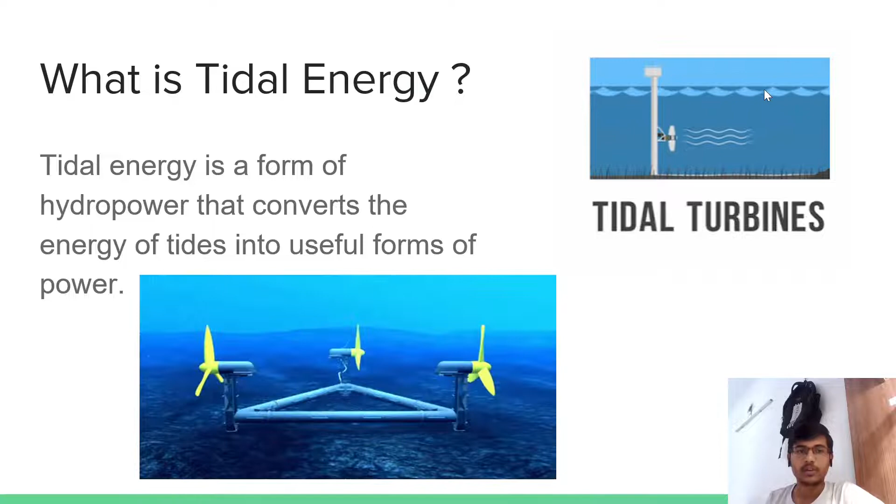So the first question in your mind is, what is tidal energy? Tidal energy is a form of hydropower that converts the energy of tides into useful forms of power. As we all know, demand of electricity is increasing and global warming also threatens human life. It's time to move away from fossil fuel and other sources. So we choose tidal energy.

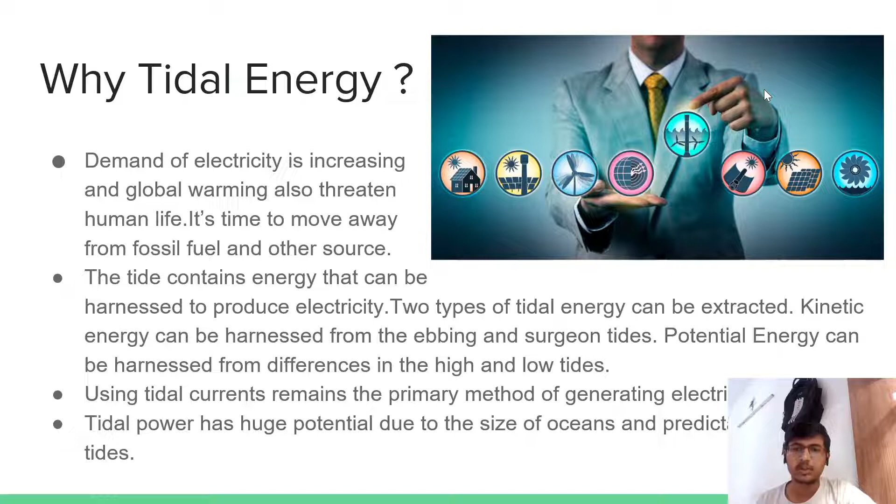But why tidal energy? There are various other sources like solar and hydro, etc. The answer is that tidal power has huge potential due to the size of the ocean and the predictability of tides, which makes it a great option against other ones.

The first tidal power station in the world was built in 1966, located on the Rance River in Brittany. The plant was for 45 years. Its 24 turbines reach peak output at 240 megawatts and average 57 megawatts.

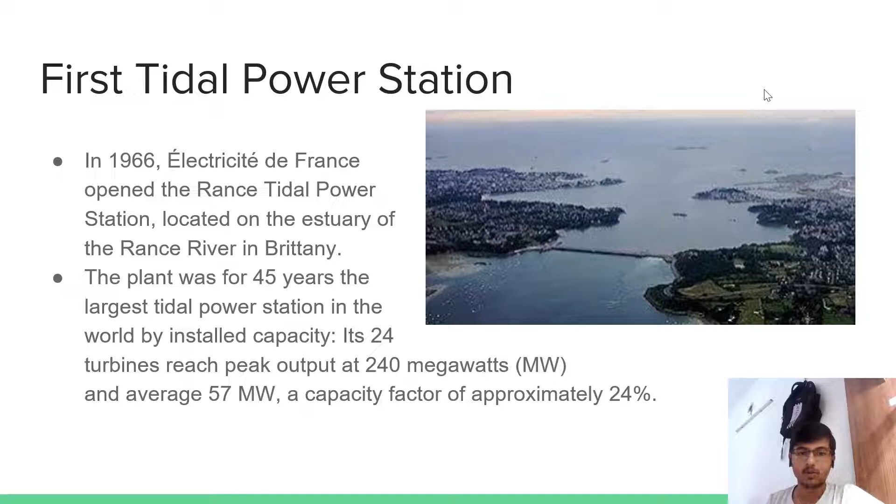Some other important key terms you may need to understand: first one, tide. The alternate rising and falling of the sea, usually twice in each lunar day at a particular place due to the attraction of celestial bodies, is known as tide. The second one is tidal force. The tidal force is the vectorial difference between the gravitational force of the earth and that of the moon.

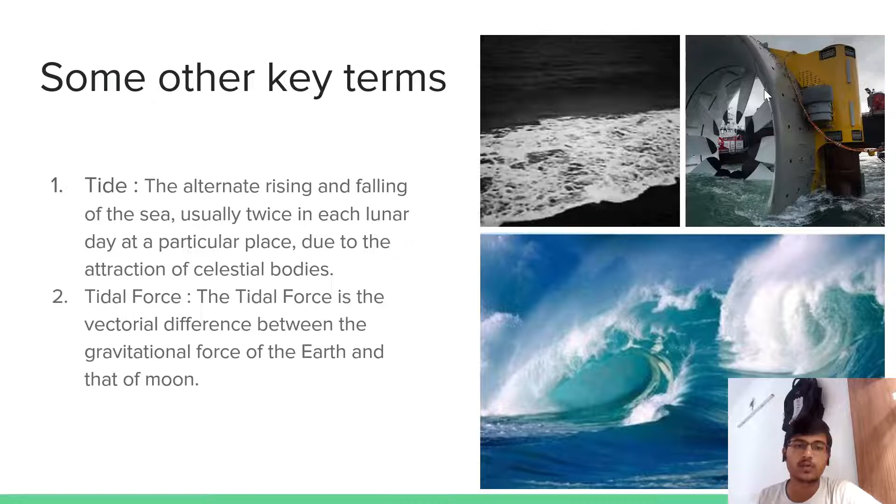But do you know what causes the tides to be generated? Let's understand the basic physics behind the tide. The gravitational pull of the sun and moon is the cause why tides are generated. There are two types of tides, high and low, during each period of rotation of the earth. As the moon and earth swing round each other, ocean water is thrown to the side of the earth away from the moon. At the same time, the moon's gravity attracts water to the side facing the moon, resulting in two periods of high tide every 24 hours.

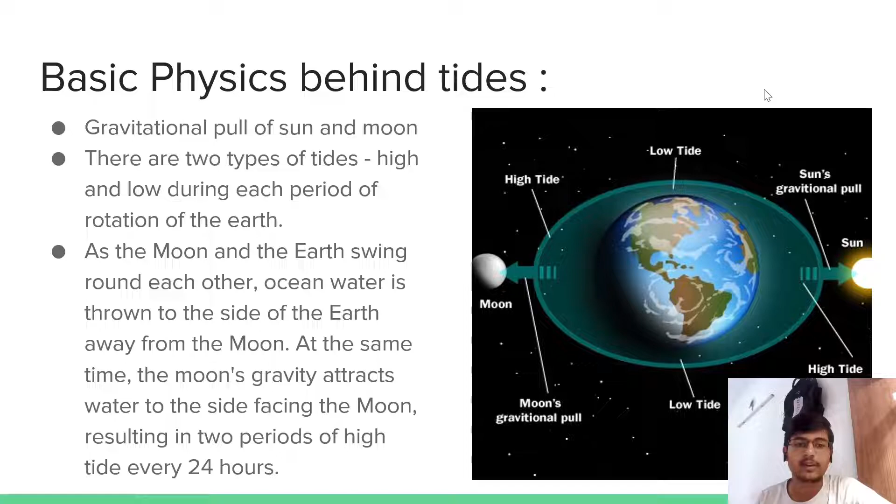Now, after understanding all the theoretical things, let's understand how to generate energy from tides and its various methods. There are mainly two ways of generating power through tides. First one, tidal stream generator. Second one is tidal barrage. The tidal barrage has the following three types of generation: ebb generation, flood generation, and dual flow.

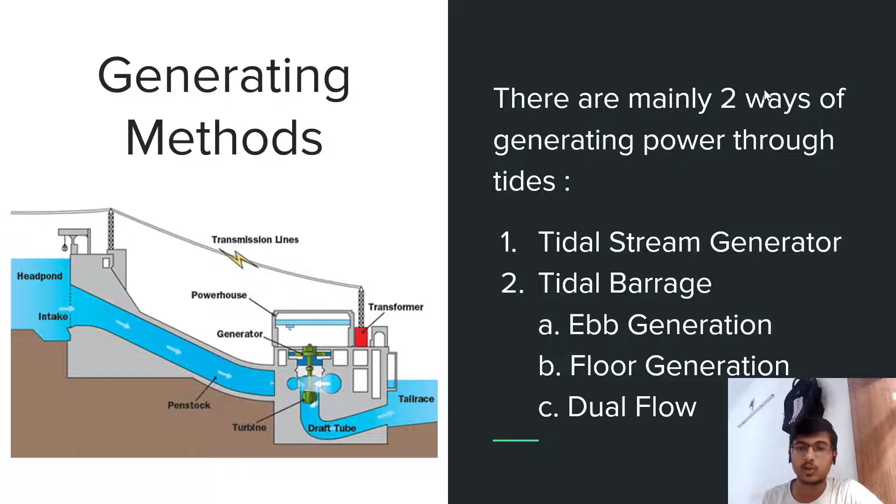Now let's understand the tidal stream generator, which uses the kinetic energy of flowing water. It can also be installed in the river, straits, conceived in the 1970s. It is the cheapest and less damaging method. Compared to wind turbines, it has similar power at a water speed of 2 knots, and 4x power at 4 to 6 knots.

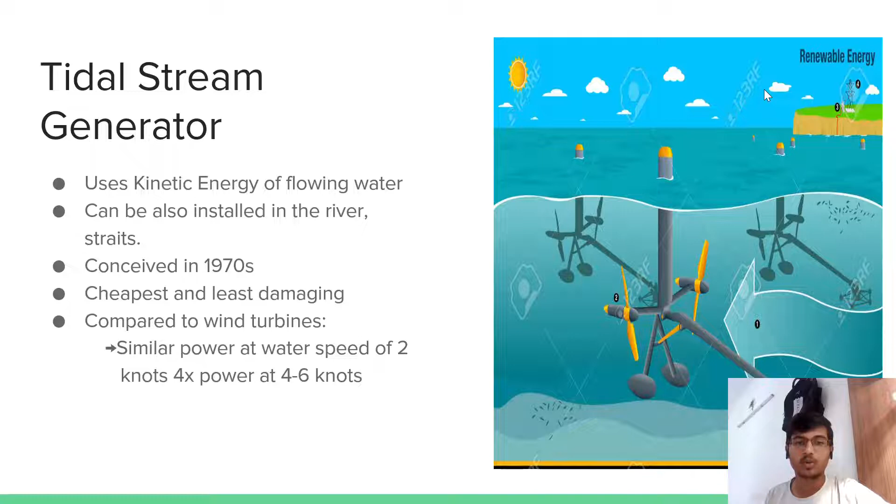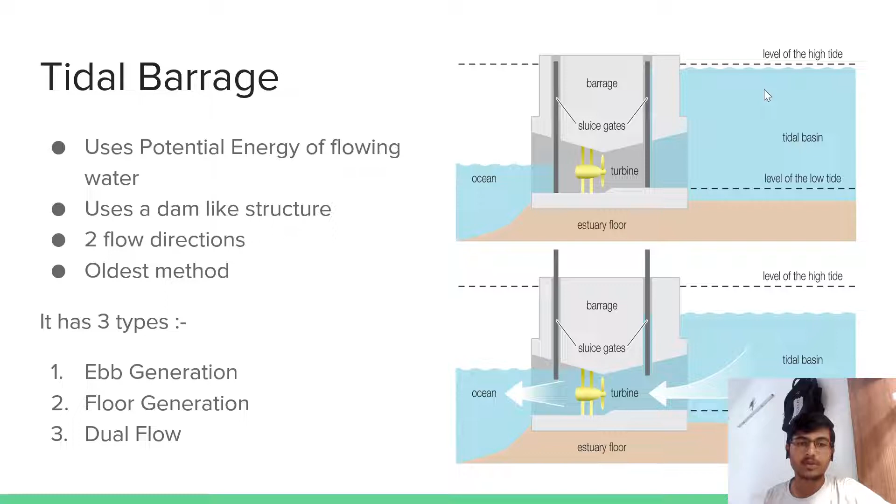Now, the second one is tidal barrage, which uses the potential energy of flowing water. It has a dam-like structure, two flow directions, and it is one of the oldest methods. It has three types. First one is ebb generation, second one is flood generation, third one is dual flow.

Now let's understand the ebb generation working. The basin is filled with the incoming high tide current. Sluice gates are closed. When the outside water level is low enough, gates are opened. Now the water going out starts running the turbine, which generates the energy, as you can see in the picture below.

Now let's understand the flood generation working. Now the basin is empty with low tide. Sluice gates are closed. When the water level outside is high enough, gates are opened. Now the water flowing will rotate the turbine, causing the generation of energy. So it's like the opposite working of ebb and flow.

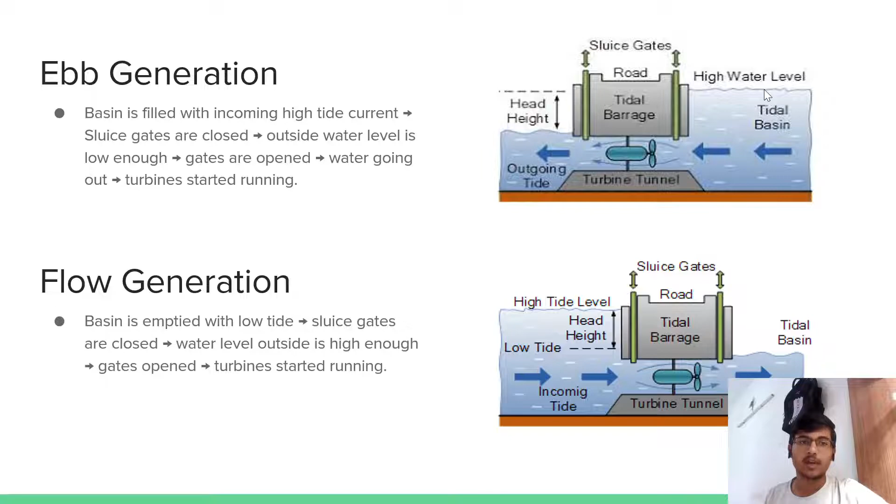So till now we have discussed all traditional methods which are currently in use. But what are the latest upgrades in the technology? Let's check it. First one is Tidal Lagoon. It is a new design made from a combination of flood and ebb. Tidal Lagoon Swansea Bay in Wales, United Kingdom would be the first tidal power station of this kind built.

Second one is dynamic tidal power. An untried but promising technology, it proposes that very long dams, for example 30 to 50 kilometers in length, be built from the coast straight out into the sea without enclosing an area. It consists of parallel barriers to cause a water level difference, causing the generation of electricity. Currently China, Korea and the UK are working on it.

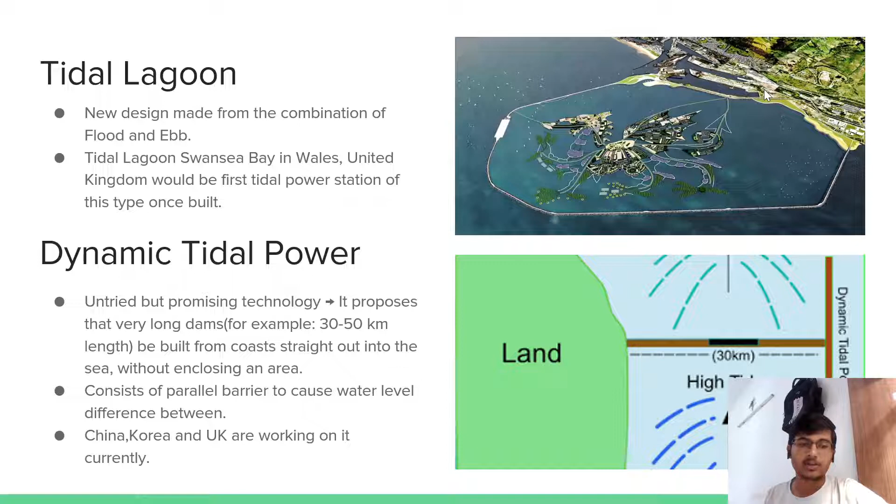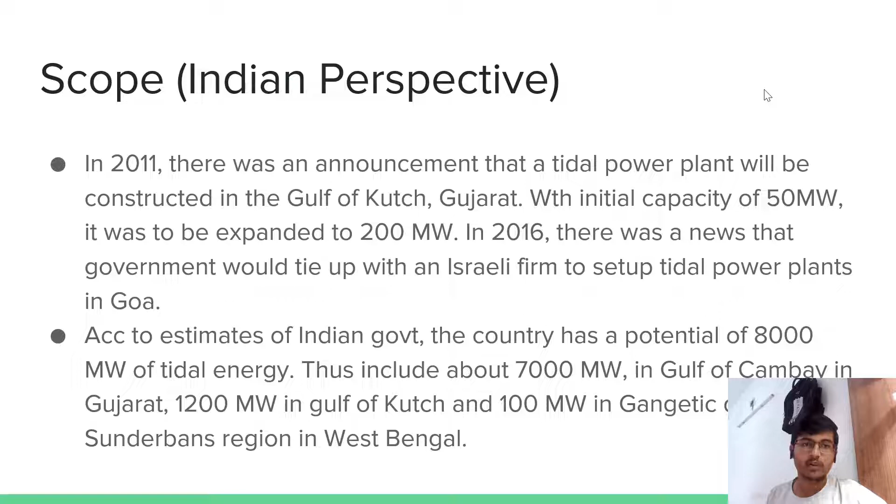After discussing all the conceptual things and generating methods, let's check the future scope with respect to the Indian perspective. In 2011, there was an announcement that a tidal power plant will be constructed in the Gulf of Kutch, Gujarat. It had an initial capacity of 50 megawatts, but it was to be expanded to 200 megawatts. According to estimates of the Indian government, the country has a potential of 8,000 megawatts of tidal energy. So it seems that tidal energy provides lots of benefits in the future with respect to the Indian perspective.

Now see the advantages of tidal power. It's a completely renewable energy. Tides' behavior is more predictable than solar and wind. It has potential for future electricity generation. New technologies are bringing down the cost and increasing the efficiency.

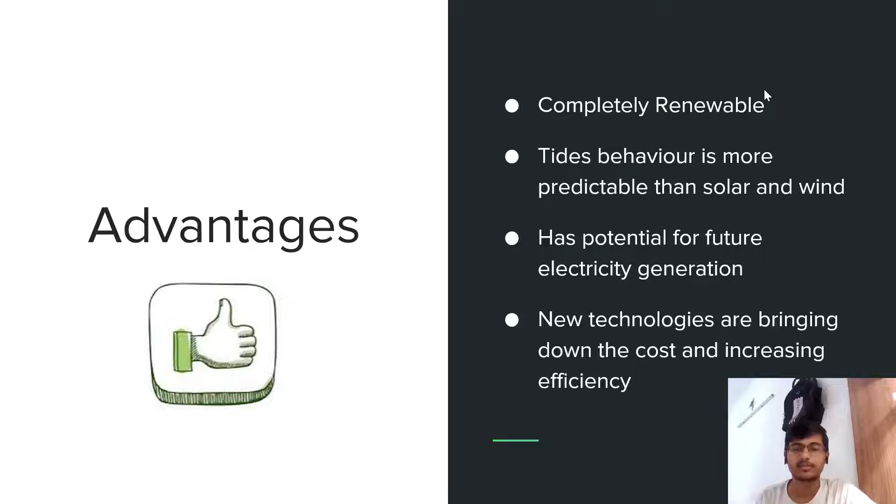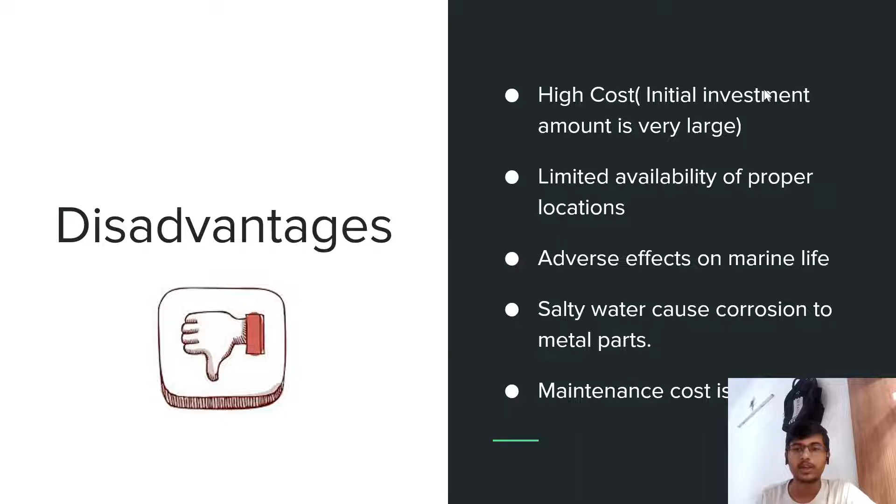Now let's move on to disadvantages. Here are some disadvantages of tidal power. It has a high cost; the initial investment amount is very large. Limited availability of proper locations. It causes adverse effects on marine life. Salty water causes corrosion of metal parts, and their maintenance cost is very high because they are located deep at the bottom of seas and oceans.

Some improvement opportunities are interfacing the TPS output with the national grids, assessments of the economic interest in order to promote or sell new ideas, new projects for unexplored areas, studies to minimize environmental impact, etc.

So finally, to conclude our presentation: tidal power is a proven technology and has the potential to generate significant amounts of electricity at certain sites around the world. Although our entire electricity needs could not be met by tidal power alone, and it may cost marine life, it can be an invaluable source of renewable energy.